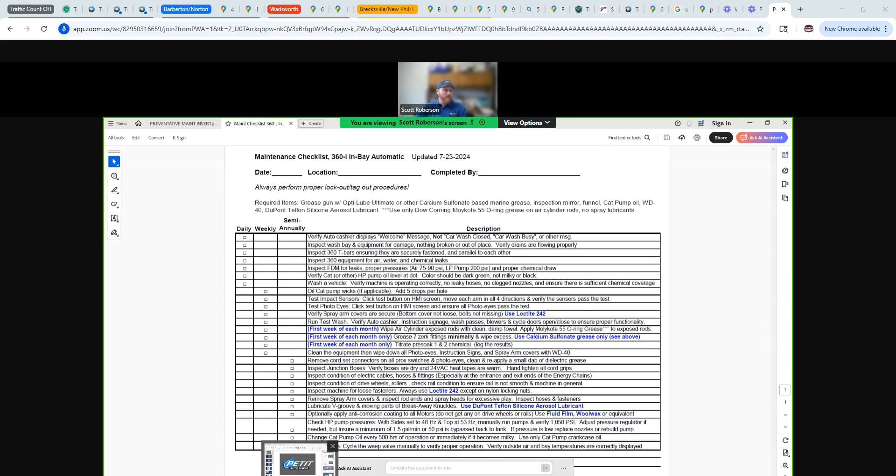We're going to go over those and I'll bounce through some pictures I got to help illustrate them. So I'm going to jump that one off and show you something else, and I'll be reading along with that and showing some pictures. Give me a quick second here. Bingo, bango, look at us, we can do technology.

So the very first thing on that list was: verify auto cashier displays welcome message, not closed or car wash busy. Obviously that's the thing that takes the money, and we're not making money if that thing's in a faulted state, frozen touchscreen, bill acceptor's not taking money, receipt printer's not working. So all those things that could make it hard for our customers to put money into the cash till, we want to make sure one of the very first things we check is the cashier is taking money and ready to go.

We're going to look over the wash bay equipment for damage. You guys know your washes better than anybody, you're going to know if something looks out of place. Is a drain backing up? Is there a broken spring on a garage door? Is there a piece of wallboard hanging? Whatever that is, just do a visual inspection of the wash to see how things are going.

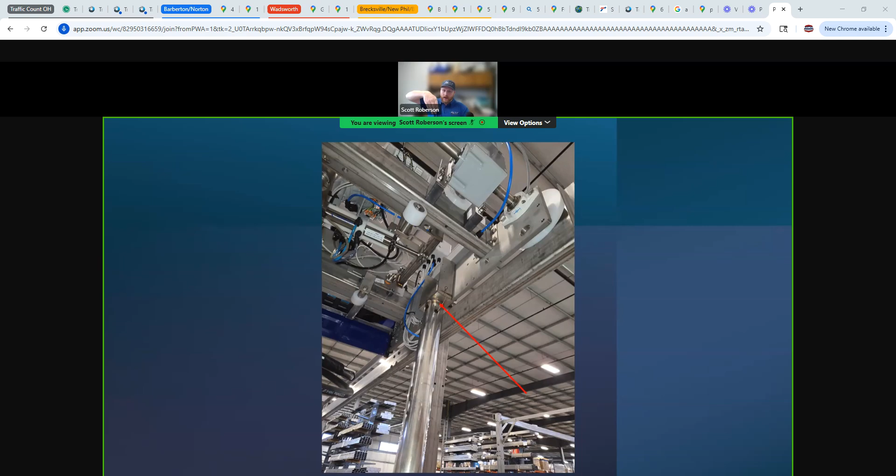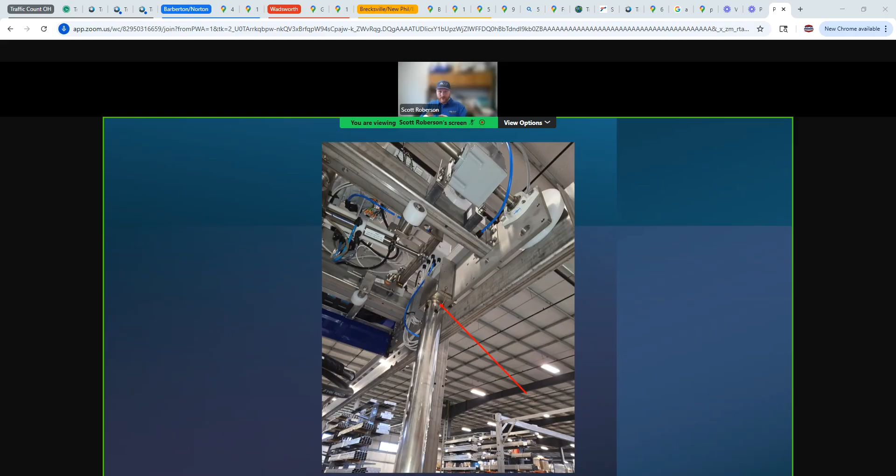The next thing on that list is to inspect the 360 T-bars. There's a driver side and a passenger side. These should be parallel to the wall, to the legs, so they shouldn't be cocked one way or another, but also they shouldn't be loose. There's going to be a little bit of that leverage effect where the longer one wants to move, but I think a lot of you guys know the difference between something that's loose and something that just has that lever effect. We want to make sure nothing has gotten loose. If it is loose, there's a bolt right here, marked by this red arrow, that can be tightened to cinch that up. Again, there's just an alignment peg with a little bit of play, so when you cinch that up you might need to take a couple measurements to make sure that T-bar is square so you're seeing the other one properly.

We're also going to inspect the 360 equipment for air, water, and chemical leaks. Common places you're going to look for those are in the E-chain, on the E-chain on the bridge, and then the spray arms themselves.

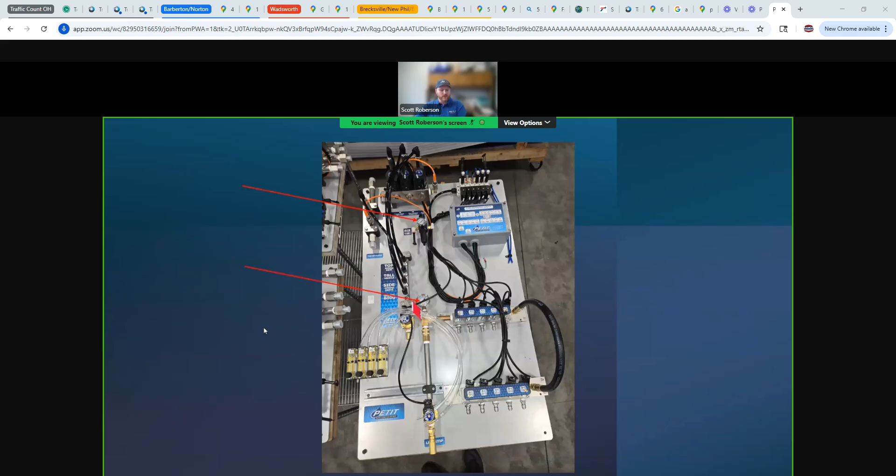Now, there's a couple ways to do this, but I'd say the easiest way is utilizing our test wash or maintenance wash functions. The way that works is I'm going to jump out of this for just a quick second and jump into one of our washes here.

So if you're here on your HMI and you click the top up here, you go into maintenance menu, and then you go to maintenance washes. If the machine is in the on run position, you guys can actually run any of your washes in what's called a wet wash, no vehicle. So the wash will pretend it's washing like a Mini Cooper or Miata or something.

This can be very handy to try to find those leaks. You click this, you start a fake wash or a ghost wash, as some of you tunnel guys will know it as, and then you can stand there in the bay and look, ooh, something's spraying during the triple foam and the E-chain. I need to go check that out and see what's going on.

The next thing that it tells you to do is inspect the FDM, or fluid distribution module, for leaks and proper pressure. The air should be set to 75 to 90 and the LP pump to 200.

Now, got some arrows here. This is that air gauge that we're talking about. The little label tells you the recommended settings as well. So this is just regulating the main air pressure to all of our air solenoids. As a lot of you know, there are some secondary regulators up here where you can fine tune the specific application - triple foam, foam waterfall, air, top and side air injects - to get the correct foam you're looking for.

And then down here, this other red line, that's the low pressure. So we want to set your chemical low pressure delivery to just at 200 psi.

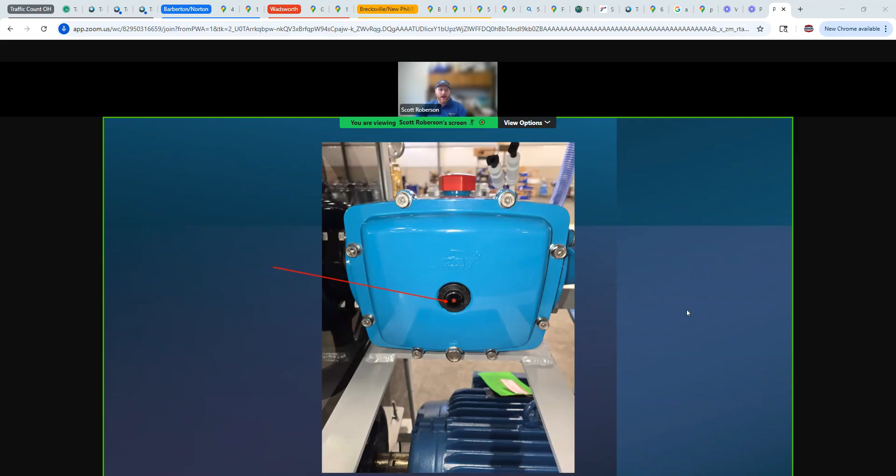Next thing, we're going to verify that the cat oil on the high pressure pumps is clear. It's got a bluish tint to it. It shouldn't be milky or anything like that - that's the indication of water. And that level should bisect this red dot here.

So it's a little hard to tell in the picture here, but that's air there. And then you have the bluish oil here, and it's bisecting that red dot to tell you if it's full.

Now, for some of you guys, you might need a little inspection mirror - a little inside baseball cool trick. I've seen some really smart guys with washes out there - they take a little piece of 3x3 square mirror and glue it to the wall behind their pump station, so they don't actually have to get an inspection mirror out there to inspect that oil level. They can just shine a flashlight at the mirror, it reflects, and you see that. So some of the smarter guys than me out there are doing that - gluing a little piece of mirror on the wall behind this pump so they can see this.

So again, that is the first of the weekly options. Before, the daily options were: verify the cashier, inspect the bay, inspect the T-bars, inspect for leaks, check the FDM for leaks and proper pressures, verify the cat oil is at the dot, and then wash a vehicle. We always want to wash a vehicle to make sure everything's working good.

Now we're going to get to our weekly things. So the weekly things are all the things we did daily, but some more options as well. The next thing we want to do is test the impact sensors. You can test those impact sensors from the screen.

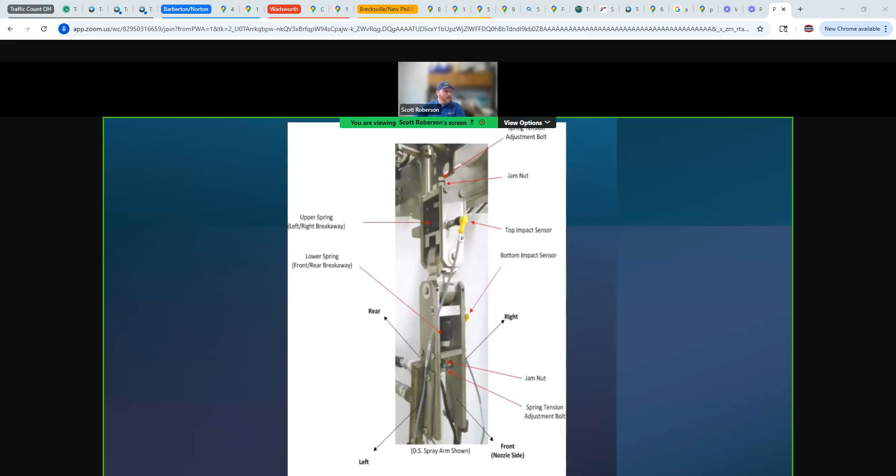Going back real quick, on the front of this cat pump weekly, there are three little spots where there are little plastic caps with holes poked in them. Old school guys might remember we used to have oilers on our pumps back then, but the oilers were hard to keep working. So those little caps aren't just for show or protection, we've actually poked a little hole in them. If you fill those caps up with oil, that's going to lubricate the wicks. So weekly, the cat pumps should have their wicks given a few drops of oil. That's on the front side of this pump here. I'm sorry I don't have a picture of that, but that's on the front side of this pump.

Again, we also want to test the impact sensor and photo eyes weekly. For those that don't know, the impact sensors are on the breakaway here, and the photo eyes are going down the T-bar. Again, you can do those on the test wash pass screen. Also, when we were talking about setting those pressures, we can do that up here as well, A1, B1, to run that high volume demand for our chemical pump.

We again want to verify our spray arm covers are secure. So weekly, we want to check to make sure these spray arm covers aren't getting loose. There's a 9/16 headed bolt down here, a brass bolt, that you want to make sure to tighten at the bottom. And then the top has 2 bolts on a slot as well. Again, we always want to run a test wash.

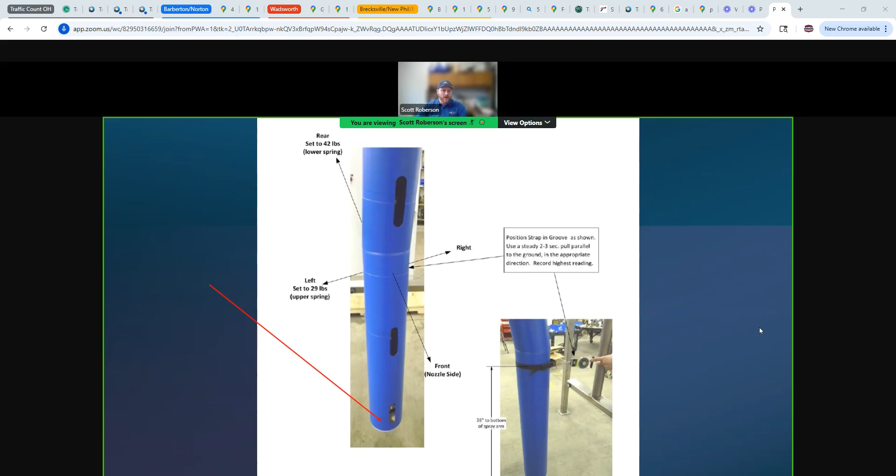And now we get to some monthly things. So under our weekly, we say the first week of each month, do these items. Those count as monthlies. The first of those monthly items is to wipe the air cylinder exposed rods with a clean, damp towel and apply Molykote 55 O-ring grease.

So when we talk about that Molykote 55 grease, there are 2 tubes that kind of look the same. One will say 55 O-ring grease, one will say dielectric grease. We're looking for that white grease when we talk about that 55 Molykote grease. Now what we need to do to apply that is extend these cylinders, because then we want to wipe down any residual grease that's left over, any debris that's on those, and apply some new grease on those. That'll keep these wiper seals and O-rings protected.

Now, in order to extend those, because we normally keep those rods tucked in during idle time so that water spots don't start to rust the cylinder. So when your wash is sitting there waiting for a car, those cylinders are tucked in, both of those rods are tucked in. The easiest way to make them extend is to hit rotate arms to rear of car, and then they will fully extend on both sides so that you can wipe them clean and apply new grease.

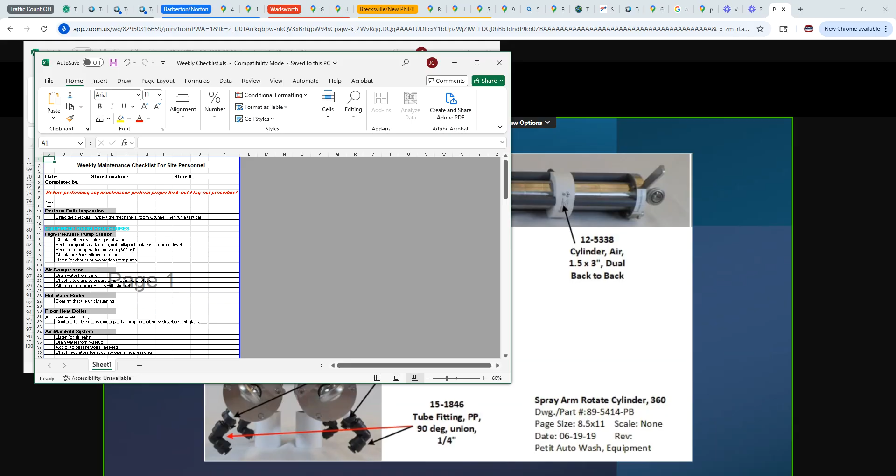Next weekly item that you're going to want to take care of is the 7 grease fittings on the machine. We send the machine with a tube of calcium sulfonate marine grade grease. That tube is going to last you a long time because we recommend a single pump of grease once a month. So a lot of you guys that might have grown up on a farm, when you grease the plow or the brush hog or anything, you pumped grease into that thing until all the old grease, water, and dirt came out and you saw new grease.

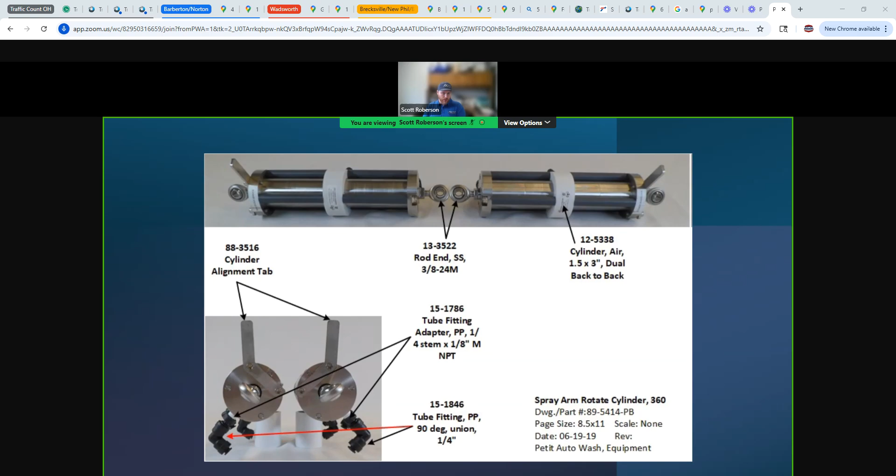Our bearings aren't like that. If you start to see grease pump out, you've actually broken the seal, which will allow water to get back in. So it's actually better to not grease our bearings than to over grease them and break the seal. Our recommendation is 1 pump of grease once a month, and that should be a calcium sulfonate or marine grade grease.

Those should be greased once a month with a single pump of grease. And then the last thing you should do monthly at this time would be to titrate your chemicals.

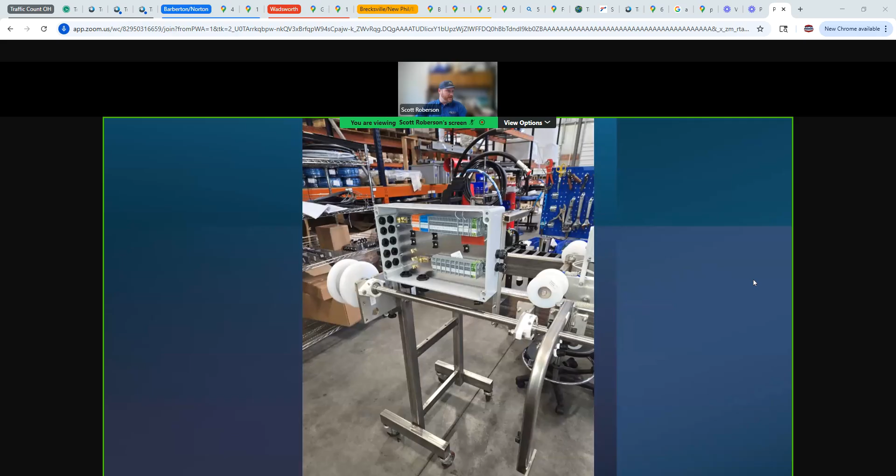And then the last thing that a lot of us aren't doing is wiping down all of our plastics. That could be signage, the bridge cover graphics, your bollard covers, your dryer producers, photo eyes, all those plastics. We recommend you take a rag and some WD-40, spray the rag with WD-40, and wipe all that. We want you to wipe the photo eye lenses, all the signage, all that stuff I just named. Two things it's going to do.

WD-40 is a solvent cleaner, so it's going to clean those plastics up pretty nice, but it's got an oil base to it, so it will repel water. As you're using this to clean and make those look nice, it's also leaving behind just a tiny bit of a film of water repellent. That's going to keep it off photo eyes, off all these plastics, and keep them looking better longer.

So that completes the end of the daily, weekly, and monthly. Now we get to the semi-annual, that every 6 month thing. This is going to take a few hours per bay to do properly. If you're really trying to do this the right way, you're going to try to find that rainy day and knock out 2 or 3 hours to get these items done.

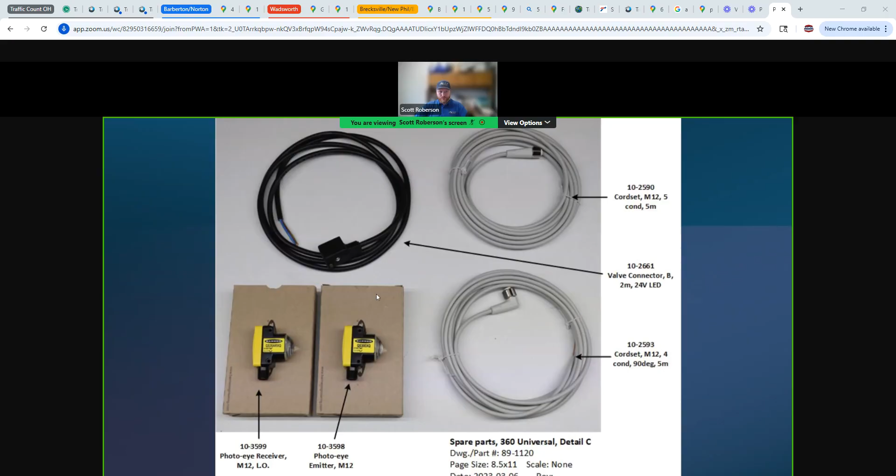We want to open up all of our junction boxes. First, we're looking for the presence of water. Second, we're going to tighten the cord grips while we're there, just grabbing all these cord grips by hand and making sure they're tight. Third, we're also going to check the heat tape, this orange tape.

All of the Petit junction boxes are heated, and this is to keep them above ambient temperature. As you may or may not know, if the air temperature is above ambient temperature, water will not condense into liquid. So by heating the box, it keeps that moist air that's going to get into these boxes—we just can't stop it—moving, so it goes in and goes out and never condenses within the box. So we want to check these heaters to make sure they're working, so that it keeps that environment proper to keep the water out.

But again, we're going to check for any water, check the heat tape, and snug up all our cord grips while we're up there.

We're going to take and inspect the condition of all of our electrical cables, hoses, and fittings. This is at obvious wear points where things might transition from the equipment room or out of the attic. We're going to look at our main E-chain running down the passenger side of our equipment, but also the smaller E-chains up on the equipment. We're checking all of our hoses and cord sets, looking for signs of abnormal wear, hoses starting to fray, anything broken, anything messed up.

So if we can get ahead of it, if we see a hose starting to rub but it hasn't rubbed through and burst yet, well, we're not down yet. We can say, hey, I need to get a replacement hose for there, and get it replaced on a rainy day.

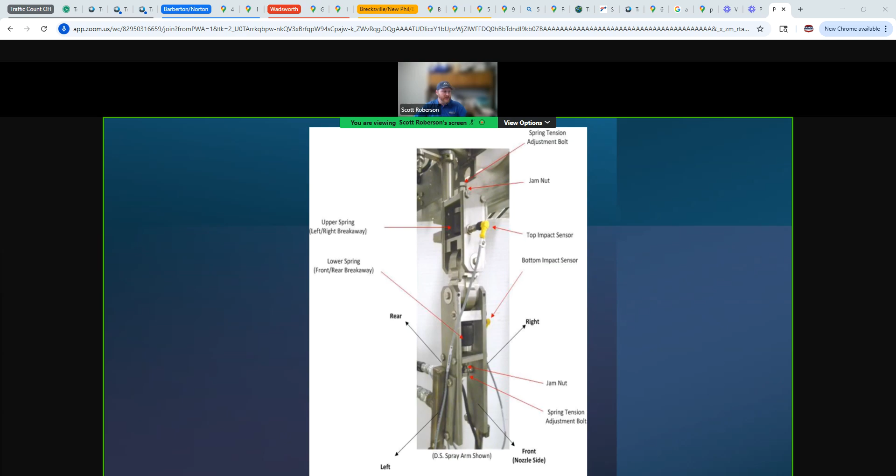If you start to see 1,100 or more, it will run, but you're tickling pretty close to the high pressure alarm. We have very sensitive pressure transducers that measure every time those pistons move, so we see the spikes. Sometimes what might happen is just a fluke, we see a spike that goes above that high pressure alarm, and it's going to shut you down. So our recommendation is going to be 1,100 at the manual gauge on the pump, which will then read around 1,050 here.

Again, you'll utilize the recommended speeds to check that pressure. If you notice that the pressure is low and it shouldn't be, you may be using some really nasty water and it might be starting to tear up the nozzles. Usually there's some extra in the pump, so you can just adjust the regulator up. But just know that if you do that a couple times, eventually we'll run out of volume and we'll probably need to address the nozzles at that time.

Changing the cat pump oil, we just recommend you do it once a year. It's actually meant to be done every 500 hours of operation. If you measure how often those things run, we're talking about 1 minute per car, so you take 500 times that by 60, it's basically every 30,000 cars. So basically once a year, or if you see the oil become milky in your monthly inspections, you'd want to change that cat pump oil.

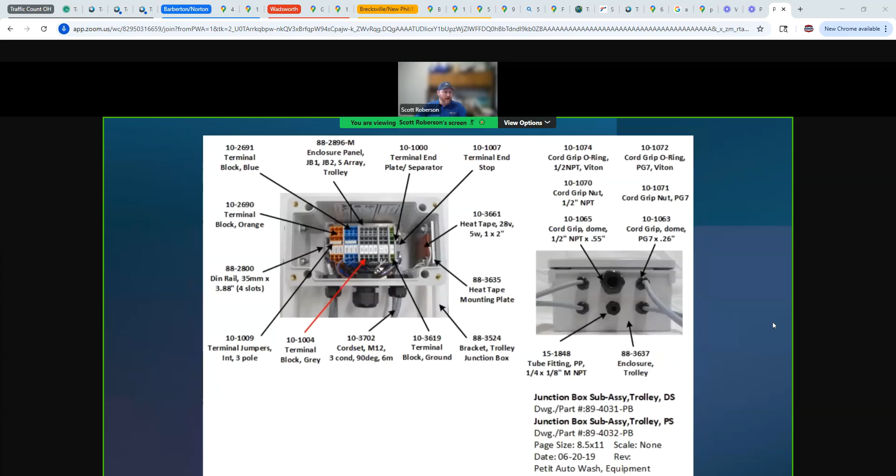There will be a little Q&A here at the end, but before I jump into that, I want to talk a little bit about a few other items that aren't the Petit that you may or may not be doing some maintenance on. Dryers is a big one.

In most cases, vibration is from debris buildup on your wheel or that the motor bearing is or has failed. If you have debris buildup on the wheel, remove the housing and scrape the debris with a wire brush or scraper, wipe away clean with rag and soapy water, and reinstall the housing. So daily, as part of that, we should be running a test wash, also listening and looking at our dryers.

Monthly for Premier, they want you to check for any loose bolts on the blower system. This includes the housing, the back plate, and the wheel for any loose fasteners. If you find loose or missing bolts, this is typically a sign of excessive vibration within your blower. In most cases, this is again from buildup or a bad motor bearing. So during these inspections, we'll want to look for all that, and we'll want to clean the wheel at that time as well.